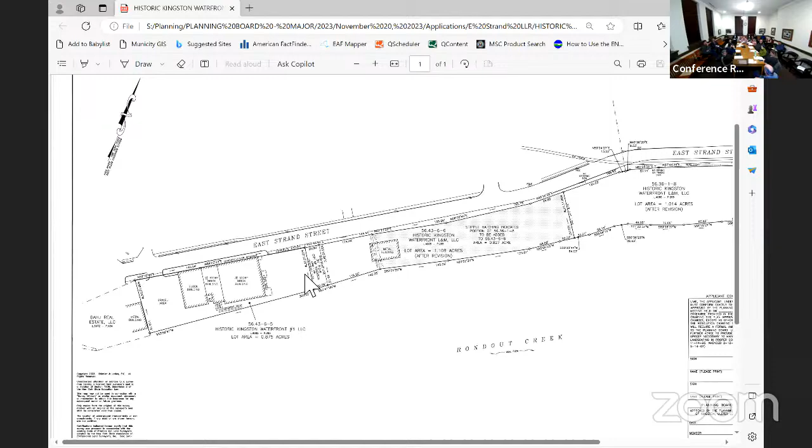All right, so under SEQR, this is a type 2 action, so no further review before is required.

Opposed? Carried. Thank you, sir. Thank you, very good seeing you. Go back and drop it. We can let you. Thanks. Thank you. Good evening. Hi, Chris. That'd be a good thing. Yeah. Thank you.

Okay, item number 4 is 100 Lucas Avenue. It's a special permit renewal for a radio communication antenna. Section block and lot is 56.89-2, -25.200. SEQR determination, transect zone T3N, Ward 1. Seventh-day Adventist Church is the applicant owner.

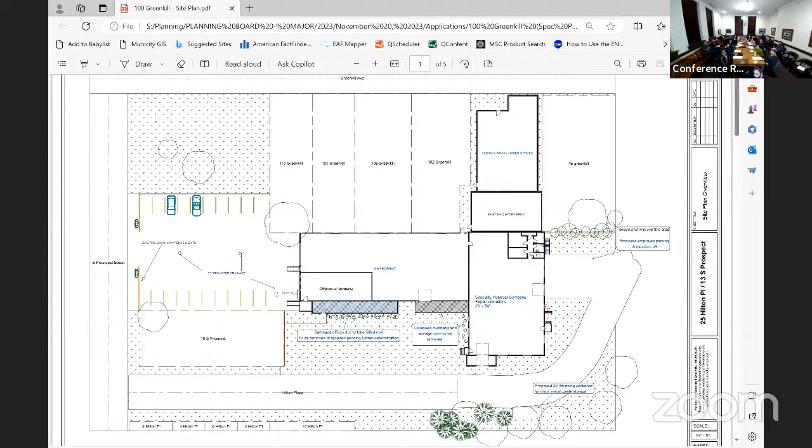This is generally a dirt road that has been used - it's on the 1929 Sanborn fire map, so it's been there a long time. You can kind of drive around here, but that's not actually a road on the backside. If you know where the CSX yard is, where DPW is staging all the road work for Midtown right now, that's this spot right on that side.

So your intent is only to use the access off Hilton Place? Yeah, you can drive around there, but you don't want to drive anything that's not a truck through there. And what's your timing on purchasing the property, just for the board members' benefit?

Hopefully sometime next year, if all goes through. So it's an old site - there are definitely environmental concerns here we're going to have to work through. Who knows how long we'll need for phase 1 and phase 2 environmental studies to see whether there's a problem. The site had been a painting facility back at the turn of the century, so who knows what's going on here.

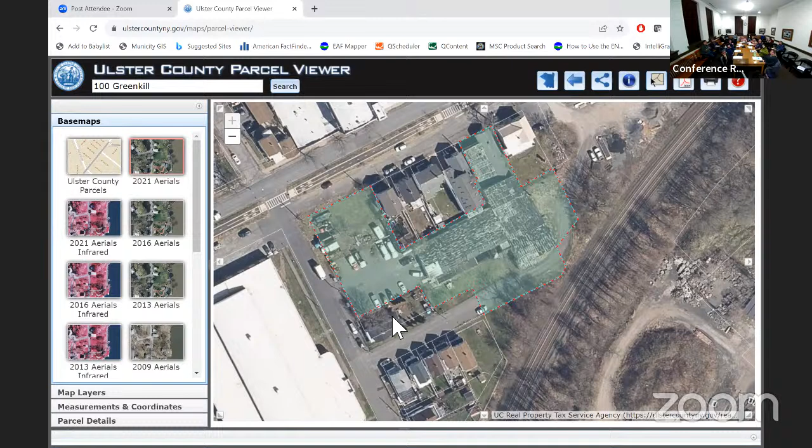The entrance here is all paved. There's no sidewalk here, and there's no green space there. So there are two planters with these weird little roofs on them. At the bare minimum, we'll rip those roofs off and fill the planters with some plantings.

And so these are items that can be taken care of on staff, right, with landscaping? Yeah, I mean, the goal is to make it look nice. We certainly don't want it to look as ignored as it kind of does right now.

If there's a specific request - you can see how overgrown it looks right now. Probably there's this little spot there, maybe some hedges along the fence. That chain link fence there is like 8 feet high - I'd like to cut that down a little bit.

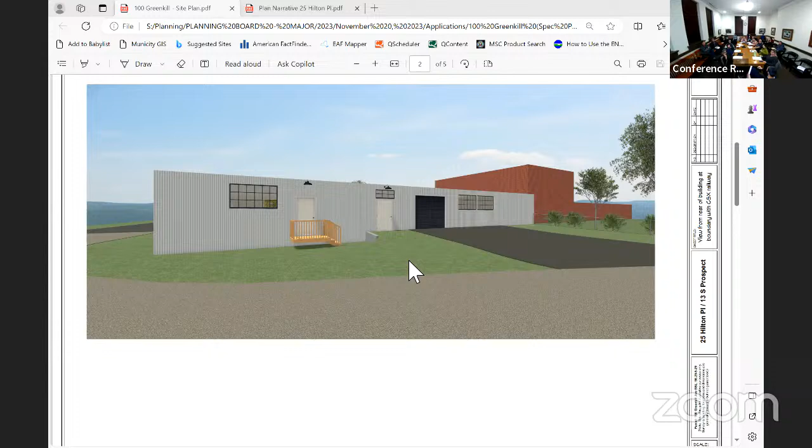There's a gate and everything there, probably put some hedges right in front of that. There's not a lot of space for landscaping unless we start ripping into the pavement, but we're doing our best.

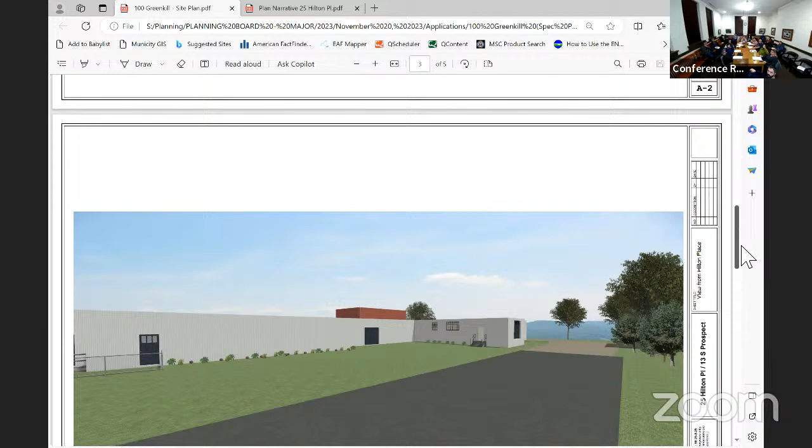That shows it from the Hilton Place side. So we'll do some plantings and pull all the debris out to make that look a little bit better. And then, yeah, this is roughly what it would look like from South Prospect once we get finished there.

We'll add some hedges, maybe cut that chain link fence down a little bit - it's a little too tall. I'm not really a big fan of chain link fences anyway, but it's already there. And this neighbor has a privacy chain link fence and they seem to have wanted it there, so we'll leave that there.

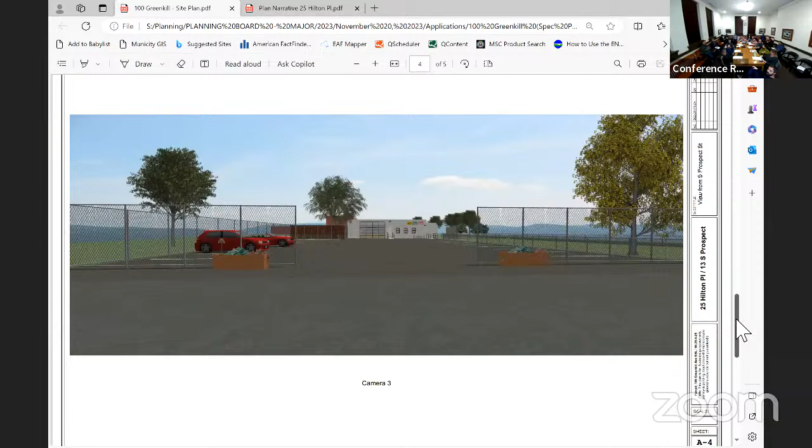Yeah, signage maybe. The signs will all be mounted on the building. You can see here the proposed final spot where the signs will go - there's the 3 DMV signs, and then there's a small business sign.

Right now we propose to put them on the side of the building. I sent a photoshopped image of it on the side of the existing building. So nothing out at the end of Hilton Place to direct people to the back for the time being - you don't feel you need that?

Don't need any of that at this point. Anybody coming there knows exactly where they're going. So there's no need for any big signage, nothing right on the street at all.

The DMV regulations say that the DMV signs need to be visible from the public street, so I can't put them on the entrance side or the back part of the building. They have to be on the side facing Hilton Place.

So that's why I kind of put them on the side of the loading dock there, which I sent in a photo of. Are you changing any of the lighting on the building?

Not changing any positions of it. All the fixtures, these are what's already in those spaces where I have the downlights. There are those outward projector, terrible looking lights, so we'll swap those fixtures for something with a nice downlighting look.

So that there's no visible bulbs or any of that kind of stuff. We're not adding any additional lighting. All that lighting is already there, there are fixtures already in those spots. They're just terrible, so we're gonna replace the fixtures with something that's more compatible.

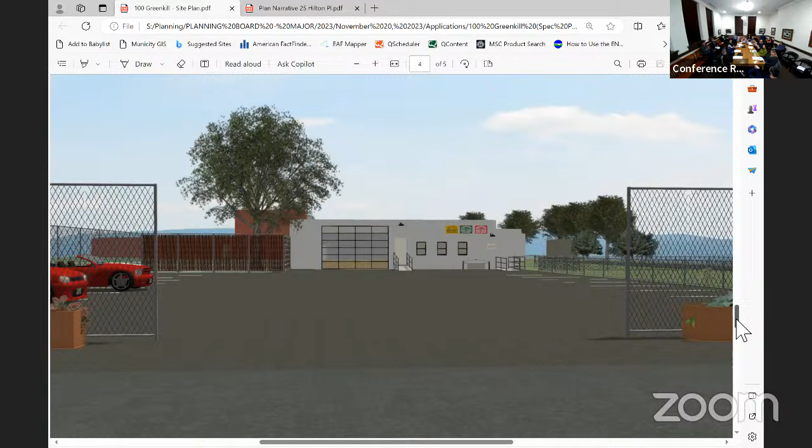Okay, and then the only thing that's kind of unique is the scrap metal and scrap tire storage, which there's like a dilapidated kind of loading dock on the side that we're gonna have to do some repair, and we'll probably just keep all that stuff there so we can unload it. We don't like to keep any of that stuff in the workshop space, keep it nice and clean in there.

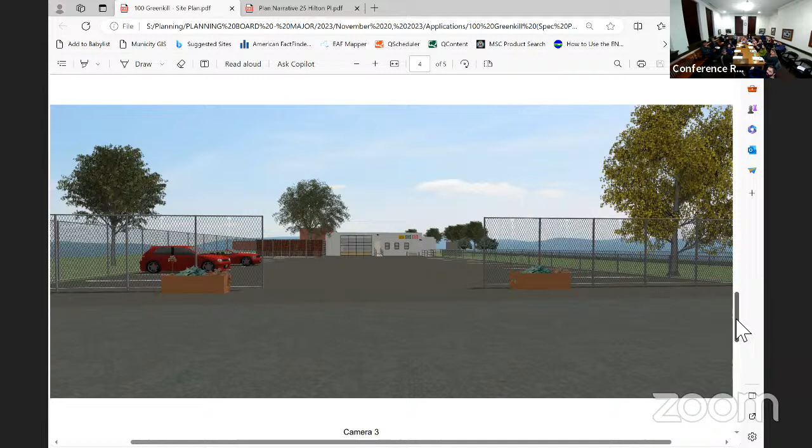So is that the area where the roof was, where you identified the roof being? Maybe if you scroll up - this is the PDF file I sent - if you scroll up to the top you'll see it in the drawing.

Yeah, so this is all totally failed and has to come off. It's actually mostly fallen off already by itself. This we don't know about yet, once we'll be able to get in here.

These are offices right now, but there's this little kind of loading dock area here that we'll be able to stage all the scrap stuff in. We really won't use it as a loading dock, but we'll be able to put that there so we just have to get rid of it a little bit more often. It's not that big of a deal, but again, I don't want to keep anything outside.

So it's not gonna be screened? I guess that's what I'm concerned about. It'll be inside, so it won't be considered open storage - we wouldn't need it to be screened from view from the street.

Oh, no, it's inside? So it'd be interior. Yeah, inside. Oh okay, I thought you said it couldn't be inside. No, it can be inside - I don't want it in the workspace, I guess, is what I meant. But this is all enclosed, that little spot there, so it won't be visible at all from outside.

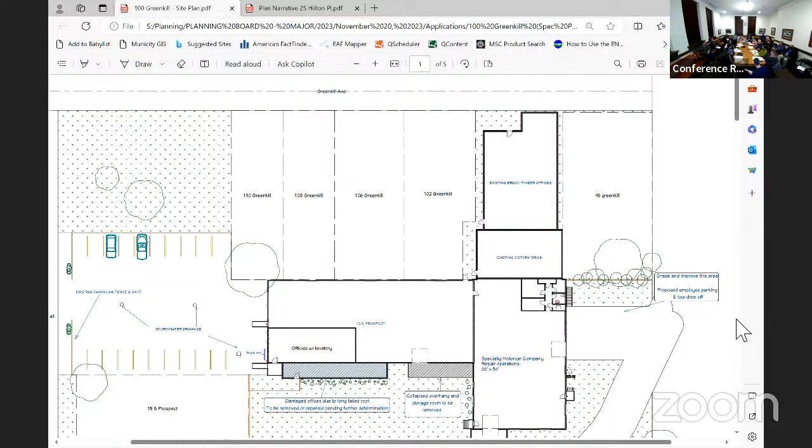All right, anything else? No, okay. Thank you for that. Under SEQR, it's a Type 2 action, so no further review of this form is required.

This time, I'll make a motion that we approve item number 5 for a period of 1 year, with board policies 4, 4A, 6, 10, 12, 14, 19, and 25. 25 is a Knox box - I don't think there's one on there, but we'll get one. Remove the shipping container from the plan, replace light fixtures with downlight, clean up property, restore green space areas. Final landscaping will be taken care of on staff level, and reduce the fence height on South Prospect Street. That's the motion. Do I have a second? Second by Matt Gillis. All in favor? Aye, opposed, carried. Thank you, sir.

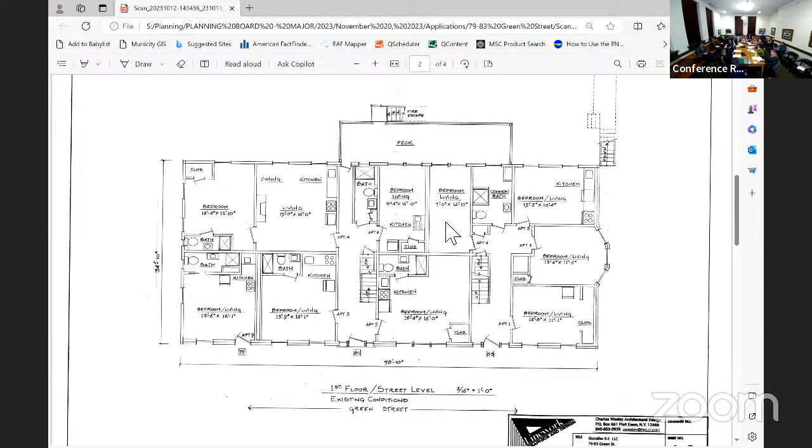Okay, can we go back to the basement? Sure, for Kyla? Right there, where the washer dryer room is. I can move the washer dryer, eventually we'll see how it goes, but I could probably add washer dryers back in some storage area, in the storage workshop area when the time comes along.

So okay, it's progressing. The washer and dryer area, you're saying is gonna become a common kitchen, a shared kitchen? That, or where it says storage workshop. Okay, let's talk to the building department about logistically if that works.

Sure, building code wise, sure, before anything goes. It's all electric, just got a fridge, an electric stove, a microwave, countertop.

And that staircase would come down from the first floor, so those rooms would have that access that way, correct? Yes, correct. Everything's outside to go inside to get down there. Yes.

Right, so we'll need to see some amended floor plans, then, right? Yep, no problem. Sure.

And as far as the number of boarding house rooms, there's potentially a waiver. We've talked to Ben about that already. Once we figure out what the final plan is going to be, there's potentially a waiver for exceeding the number of rooms for a boarding house. Boarding houses can only have up to 10 rooms under the code, so there is that possibility if the rooms are not outfitted. We're talking to Corp Counsel, Building Department, and we'll bring Ben into that mix as well to figure out the final plan.

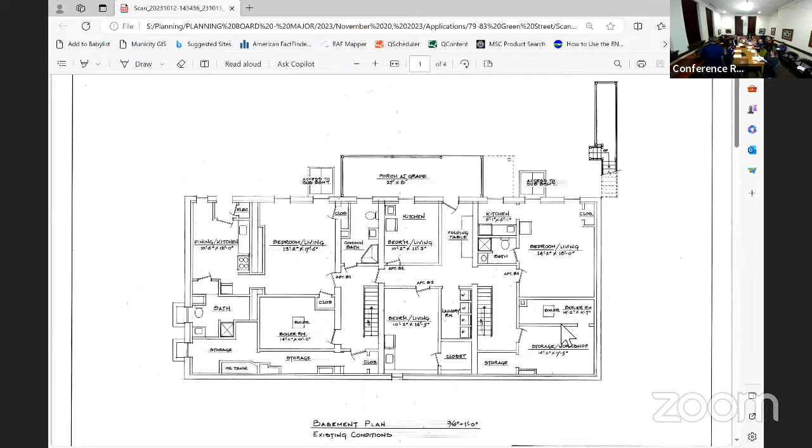Moving on to item number 7, 336 East Chester Street. Stay for this one. Special permit renewal for general commercial auto-oriented services and controlled substance sales. Section block lot is 48.83-2-1.100, SEQR determination, transect zone P3N-O, Ward 7, MNZ Realty Holdings Incorporated is the applicant. Anybody besides this gentleman here wishing to speak on item number 7?

Okay, hello again. Hi there, my name is Abdul Razak. Can you state your name for the record please? Abdul Razak. Okay, so this is on the corner of Lincoln Street, right? That's what we're talking about?

The bottle return business hasn't started yet because we have to deal with the tenant to take it out. This is the process through the court. It should be done next month, then we start. So you do plan to move forward with it? Yeah. Just gotta get the key from the tenant. The previous tenant said he don't want to move, so I have to take him to court. Same process - he just doesn't want to move.

And I know it's not part of the property we're talking about, but this gazebo that some folks go to, what's the status with that? Is that still going to be in? Well, it's not included in the open space, that's something we'll have to get dealt with along the way, because you have a neighbor who's okay with that right now. Yeah, it's been a good relationship thus far, and people have been using it, and we're hoping that it continues.

One new document that is in your packets is the rules, and they did submit the operations plan, which was in your packets last month. But there's also tenant rules, it's a basic form that I believe you probably use in other locations.

Correct. So one thing we noticed is that there's no smoking within 30 feet of your property. Yeah, so that's going to put people that want to smoke on the other side of the street and into the neighborhood, not in your outdoor areas which might be more appropriate places. Yeah, and we're happy to amend that particularly for this property. I think when we met with the fire department and with Michael, we just know how important it's going to be to monitor smoking inside the unit. So we wanted a fairly restricted policy, at least on the books, but certainly we're sensitive to that.

Right, I mean across the street, that's true. Yeah, I'm just saying that's going to cause that, I guess. Completely understand. So we're happy to amend that just to make clear it's not in the units, but outside space is fine.

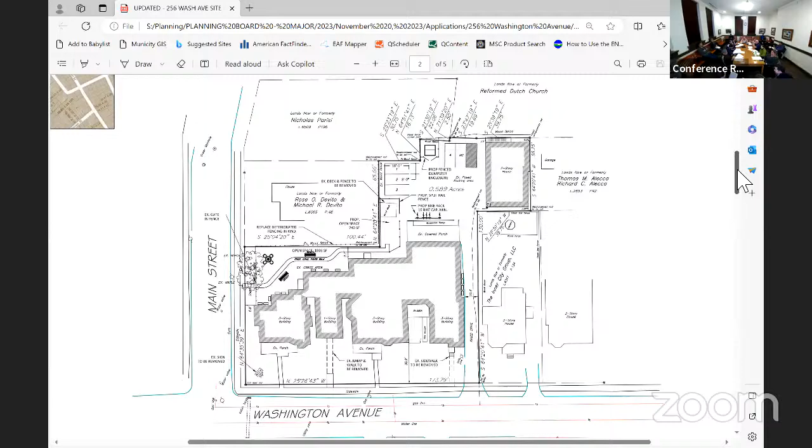And the sign has been removed, right? Yeah.

Anything else jumping in? I know we're gonna go line by line, but a lot of stuff has been done, right? Oh yeah, directly. I understand you went to, you had a second meeting with them, did you? Just the initial - I believe it was the second, and we went up and spoke with them as well.

All right, so I know you were looking for some reconsideration from them on the total rec fee. Do you want to go over what your argument was? Yeah, sure, and it kind of makes sense to me too. I already know, but just go ahead. Okay good. Yeah.

So I guess we wanted to familiarize them with our project. You may already know this, but we have a master lease, the Family of Woodstock, and they serve a lot of residents in the local community who unfortunately at this time don't have housing. These are local residents in the Kingston community. The site was previously Chiz's house and a boarding home. What we talked to them about is the code - I believe the wording says something to the effect of, to the extent your project contributes to population growth, there should be a fee applied to it.

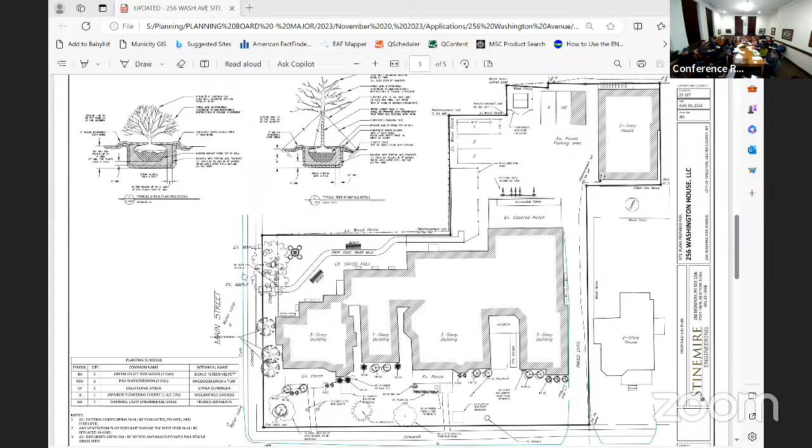We had talked about restoration of the rear porch area and rebuilding that ramp. Is that still in the plan? Yes, same configuration. I thought it was going to end up being a switchback. It's going to be, I haven't determined exactly how long it's going to be, but I will work up those elevations for you.

Also, there'll need to be a note on the plan about charging for electric bikes. The fire department does not want, particularly in multi-family residential structures, interior charging of electric bikes for obvious safety reasons, so that will not be allowed.

Where is the meeting with refuse? Refuse is in, yeah, there's a section, an area in the back where there's a dumpster, and they're actually going to be upgrading the surround on that as part of the site plan.

Let's see, just HVAC units, they're direct connect, correct? They're not going to have line sets outside, they're going to direct connect into the building? Yeah, they'll go directly inside. Okay, so just a note that that's how they're going to work with the line sets.

I also just wrote in, laundry facilities will be established in the basement, and fire escapes will be finally inspected and certified to meet the code. And then there's a bunch of other language in here, so.

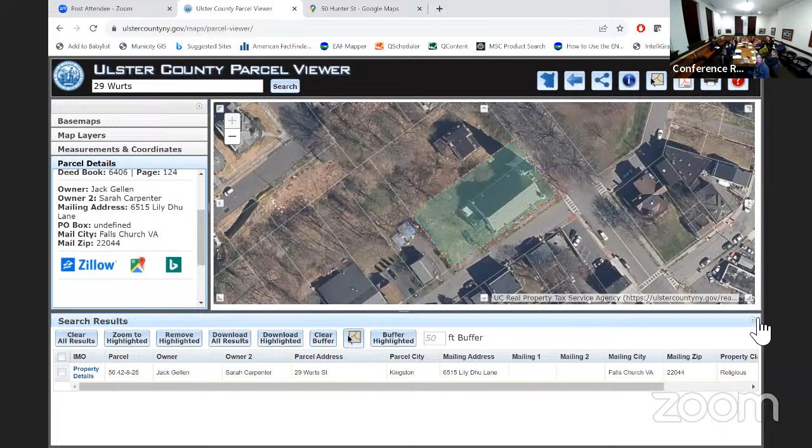This whole area back here is parking. You can see that. Is the house going to be involved in that?

Only in the sense that as we want to do composer residencies, so I would probably be putting people up. I mean, it's not going to be official, it's separate.

I think it's an excellent adaptive use for the church facility. It's no longer needed for that purpose, and I think it fits in perfectly with the Rondout neighborhood. I don't have any issue with it.

It does require a special use permit, which we've talked to them about. We've met at the site with the building department to discuss some preliminary code issues that might be concerns. We wanted them to have that information up front before moving forward with any proposal.

So things are looking very favorable for it, I don't see an issue at all. So you just need a verbal from us tonight? I think so, and then the owners will say, all right, let's go.

Thank you, exactly. And then we will of course be coming again to apply for the formal permit, the formal application.

There's a lot involved, especially for a small nonprofit, with the fees and the architects and engineers and all the things necessary, so we definitely want to know.

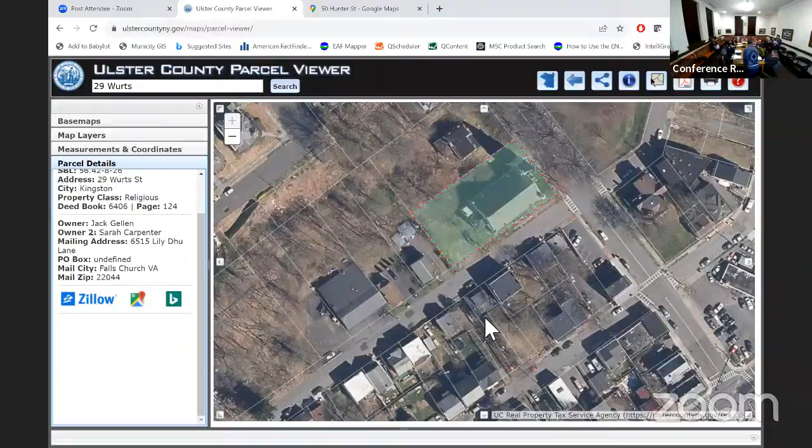And you waited the whole meeting, got to see what it's all about, and you were still nervous. Look at that, I've been here for the historic meeting. That's a whole bit. It wasn't that bad. I'm terrible. Anyway, thank you all. Thank you, thank you.

So we need, for me, but we need them here, right? You have questions? Okay, so Robert has made a motion to table item number 2.

Chuck is the second on that, tabling item number 2. All in favor? Aye. Opposed? Carried. Motion to adjourn by Matt Gillis, second by Robert Jacobson, all in favor?